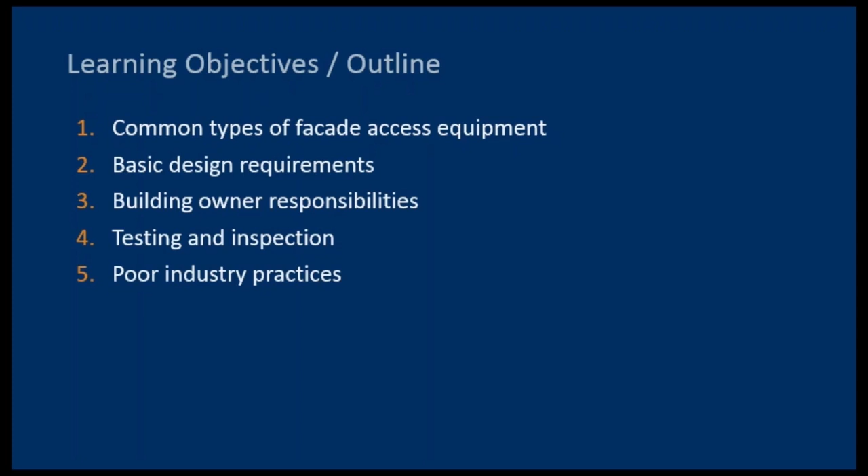We'll also focus on responsibilities that building owners and property managers have regarding facade access equipment. We'll cover some of the aspects of testing and inspections and things that you have to do on a continual basis with respect to this equipment. And we'll close by covering some poor industry practices that you should be aware of, specifically as it pertains to load testing.

To start, let's review some of the types of facade access equipment and the activities that they're commonly used to perform. I should say we'll not give an exhaustive treatment of every possible arrangement that can be used to access the building's facade, but rather focus on some of the more common equipment used on high-rise buildings in the United States.

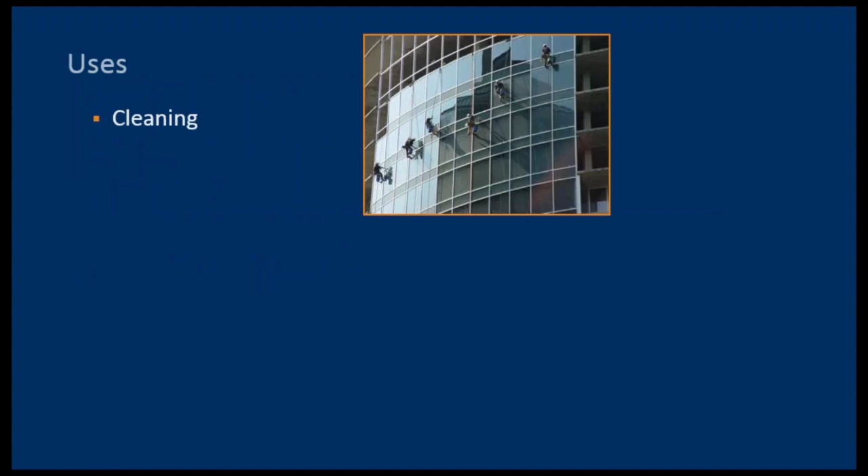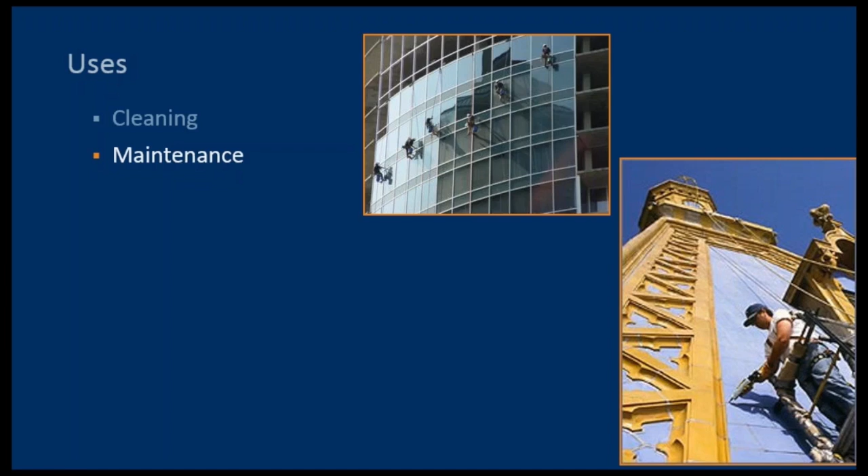So facade access. What do we need to get access to our building facades for? Probably the most common usage of facade access equipment is for window cleaning. Most buildings will have their windows cleaned several times a year depending on the climate. Facade access is also required for general facade maintenance, which may include sealant repairs or window reglazing, for example. Occasionally, more in-depth repairs are required, such as painting, masonry replacement, or metal repairs.

These activities are not all deemed construction activities by OSHA, and there are different requirements for activities deemed as maintenance versus those deemed as construction. Further, the definition of construction is not well defined in OSHA, but generally speaking, anything beyond minimal maintenance qualifies as construction and triggers additional, and in some cases, more stringent requirements.

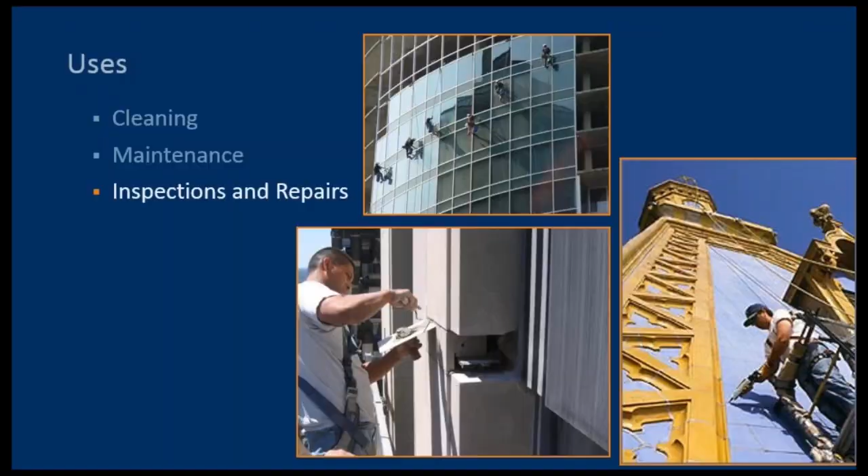While the contractor is responsible for inspecting and maintaining their platform and hoists, the building is responsible for providing suitable points to suspend the platform, as well as sufficient anchorage points to secure the lifelines and tiebacks required.

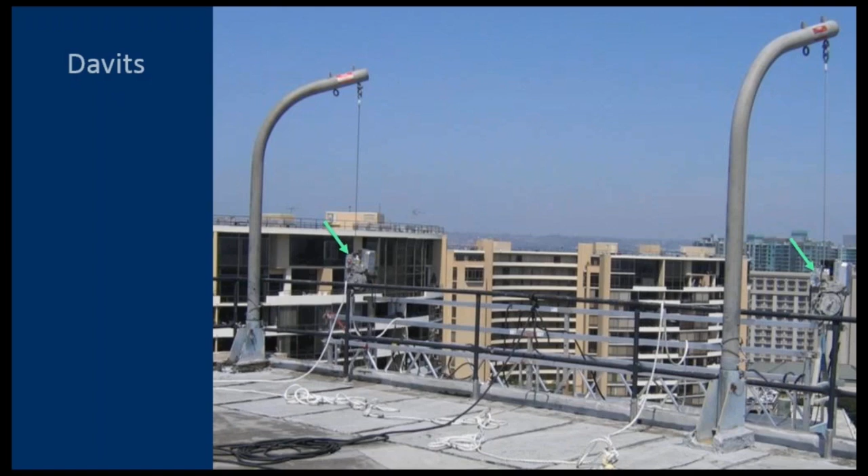Davit systems are often proprietary. There are many different kinds of davit bases. The ones on the previous slide were affixed to the roof framing. This one, in this photograph, is attached to a concrete roof parapet.

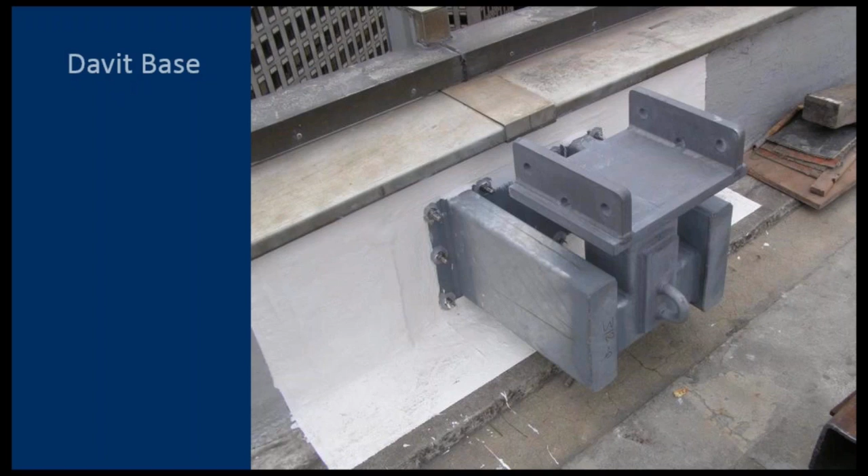Davit systems are typically constructed of galvanized steel components. However, arms more often are made of high-strength aluminum alloys to facilitate ease of installation. If you think about it, the davit arm has to be placed by a worker onto the davit base. So the lighter that davit arm can be made, the better, because it facilitates safe installation of the system.

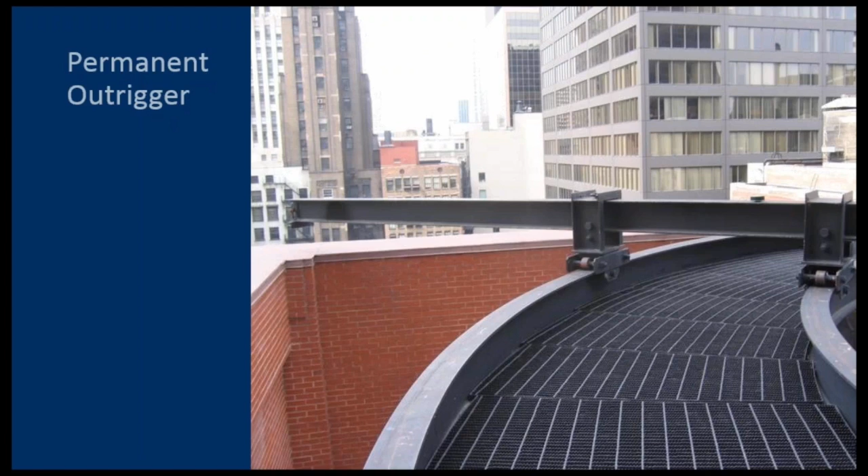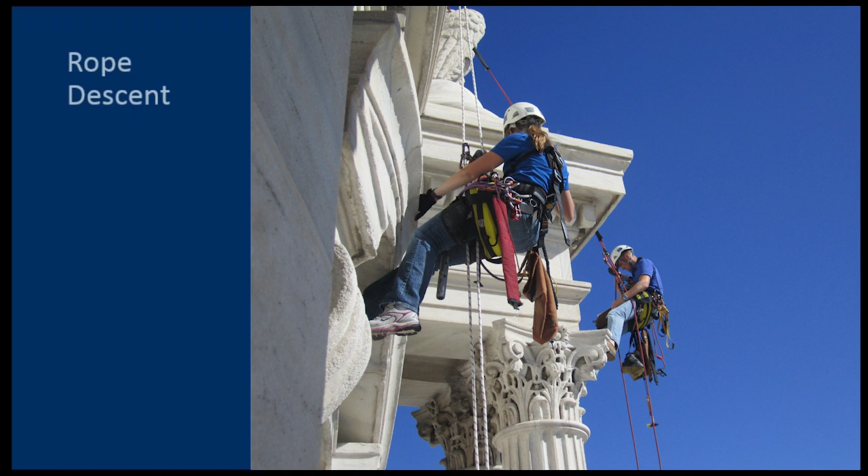Non-powered equipment such as rope descent systems or bosun's chairs are also fairly commonplace in the United States. In this case, the platform, so to speak, is merely a seat board upon which the worker rests. Rope descent systems require 2 lines, a descent or working line to support the platform, and an independent vertical lifeline that will arrest and suspend a worker in the event that they fall off their platform.

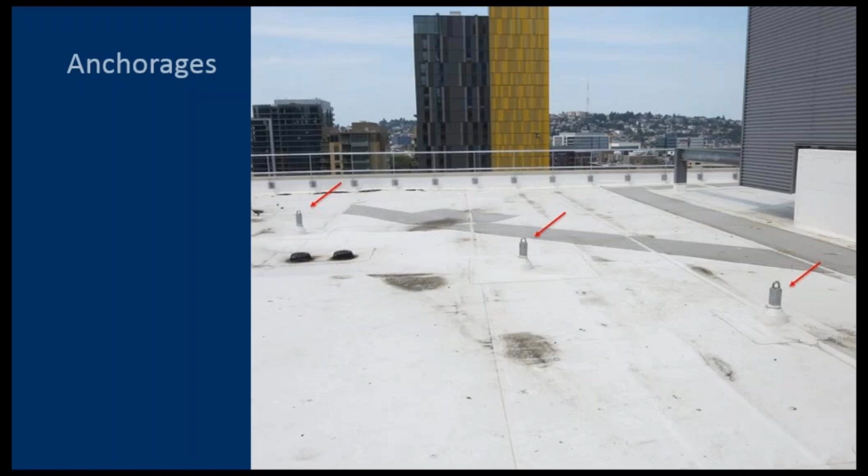Now, spacings for these types of anchorages can vary, but typically range from 5 to 10 feet, such that there are a sufficient number of anchorages easily accessible to workers depending on the wide range of drop locations and rigging configurations that might be used on a particular building.

Here's a close-up view of a typical anchorage. Note that the most important connection details of the anchorage are concealed below the roof level, and inspecting these portions requires removal of the roofing. There's really limited information you can see above the roof about how an anchorage is connected to the structure. In this case, to see that, you would actually have to remove a significant amount of roofing around the anchorage.

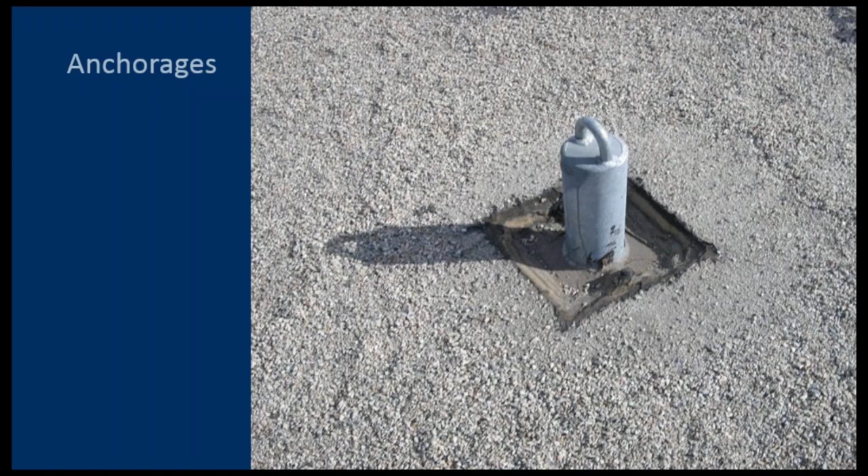Horizontal lifelines. These are sometimes encountered and can be used to connect lifelines, but not working lines. They're complicated systems owing to the fact that the tension generated in the cable can be many times greater than the applied force, just like the tension in a clothesline will far exceed the weight of the clothes it supports. And for those of us who found out that lesson the hard way, playing on our grandparents' clothesline, that's a lesson we can remember. The forces that get generated in these types of systems are very large.

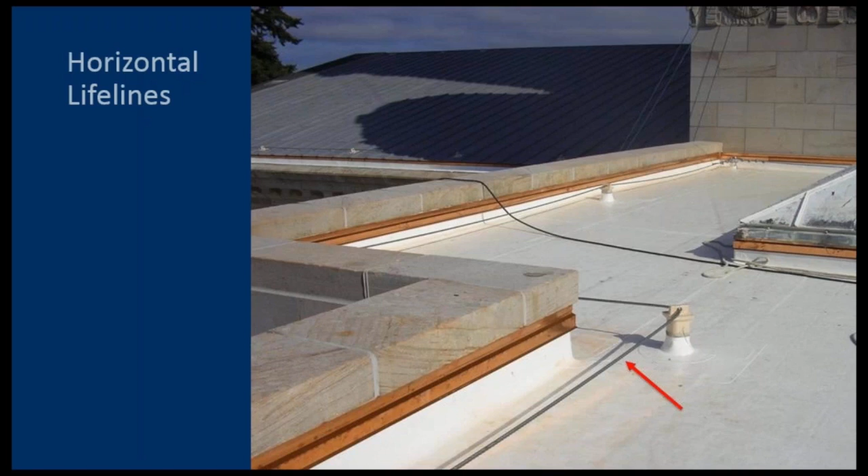Accordingly, a lot of them have energy dissipating devices that limit the forces that the lifeline system itself will transmit to the roof structure. Permanently dedicated horizontal lifeline systems require engineering, and they can often be misdesigned. For example, in this photo, load from a lifeline attached at the location of the arrow would have to travel around 2 90-degree turns to reach the energy dissipating device at the upper right corner of the photo. Due to friction at these turns, the energy dissipating device may be significantly less effective than expected.

Well, that's a brief overview of some of the more common types of equipment that you might find on a high-rise roof, just to get everybody thinking about common types of the equipment. So with that, I'll turn it over to Gwen, who will talk a little bit about design regulations that apply to this type of equipment.

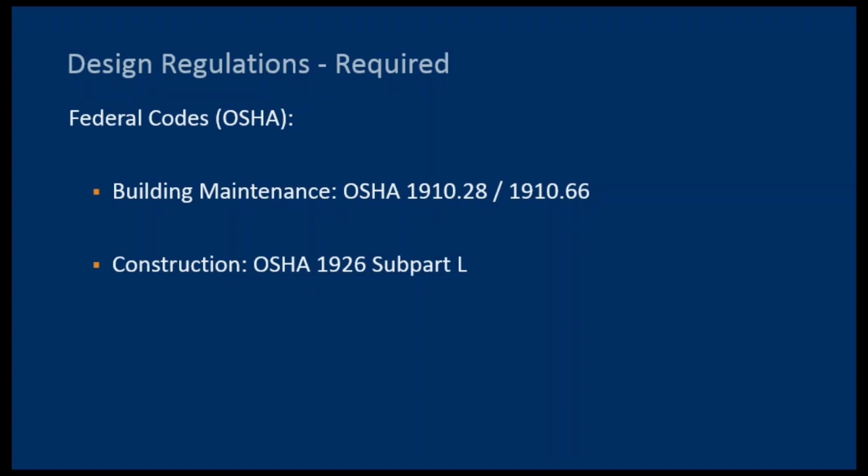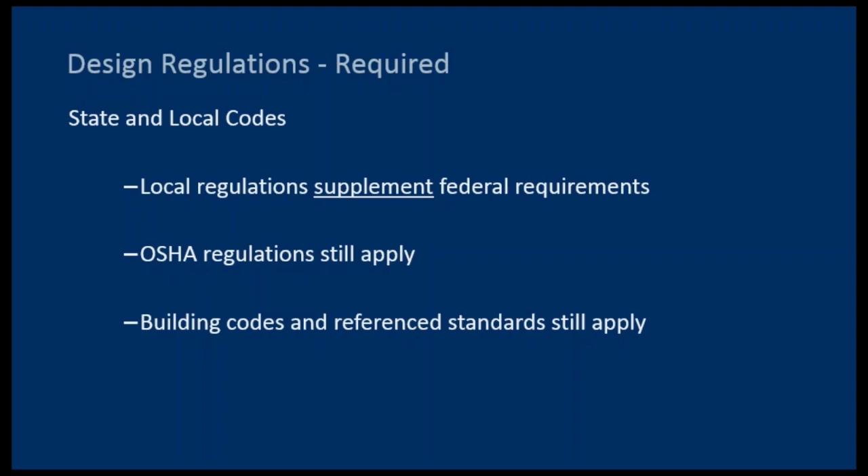You may also have, and you do have, state and local codes. Local regulations supplement the federal requirements. They can't supersede the requirements. OSHA regulations still apply. And the building codes and reference standards within the building codes also apply. So you have a number of documents and ordinances and legal requirements that need to be complied with.

There are even other standards. They're typically voluntary. They're national reference standards, the A120, the A10.8. Again, it sounds like alphabet soup. The I-14. These standards do not supersede OSHA requirements or the building code requirements. They're voluntary unless they're specifically adopted by the jurisdiction. That would be like the local building department.

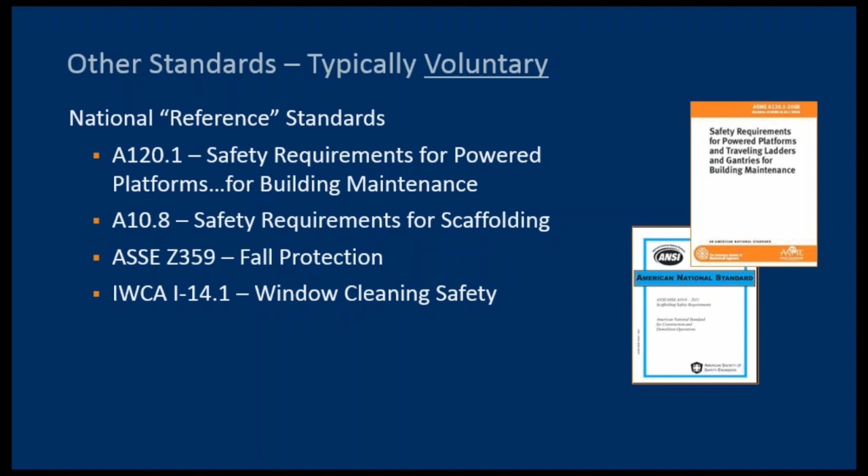I will note that the IWCA had their ANSI accreditation suspended for a while, and their standard has been administratively withdrawn. So it's no longer an ANSI standard. IWCA's accreditation with ANSI is being appealed again by at least 2 different parties. So I'm not sure whether they're going to have a standard in the future either.

There's a new standard published by SEI in 2015. Its purpose is to consolidate and summarize relevant structural provisions in the OSHA regulations into a single document and to present the provisions in a manner consistent with common engineering practice. One of OSHA's problems is that they use a lot of terms that engineers don't really know. They don't have commonly understood definitions, and so there can be a lot of argument about what OSHA is actually requiring. This document puts it into engineering language.

It's intended for structural engineers, architects, and building officials. It contains structural provisions, but no electrical or mechanical provisions. And the committee members were structural engineers.

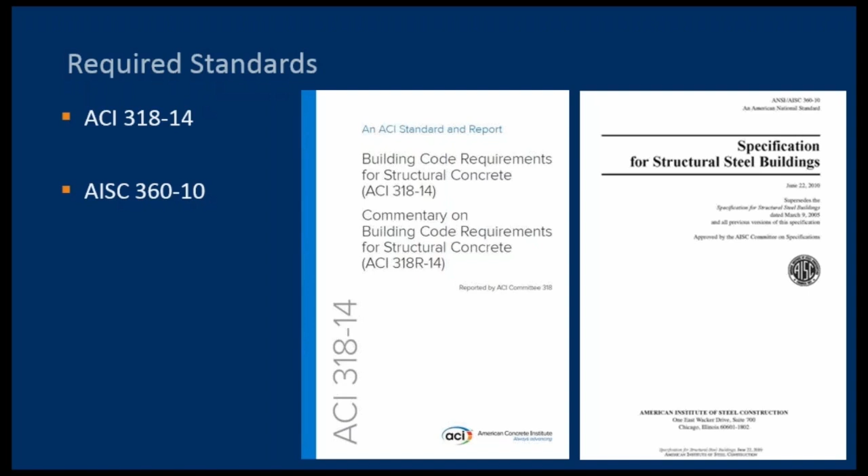The IBC, the International Building Code, you probably all know about this. The 2015 edition adopts 2 other standards, ACI 318, which is concrete, and AISC, the American Institute of Steel Construction, 360. It deals with steel. These are basically the standards one uses to design concrete and steel elements in buildings. And they're legally required to be used where the IBC has been adopted. They both contain testing provisions that must be followed according to law where the IBC has been adopted.

It's not actually the maximum load that the hoist can lift, though. The maximum load would occur if you hit a stall condition. If you're coming up the side of the building and you hit a snag, you hit something that's sticking out, the hoists don't know. The motors just keep going and going, and those davits that reach out over the side of the building can act like giant fishing poles, basically. They start bending down, and the motor keeps going until the motor stalls out.

According to OSHA, that stall load can be 3 times the rated load. So when you ask about, well, what's a realistic load, OSHA actually considers the stall load to be a realistic load. So even though your rated load is 1,000 pounds, the motor can actually probably generate up to 3,000 pounds, and that is a load that your equipment may see if something goes wrong.

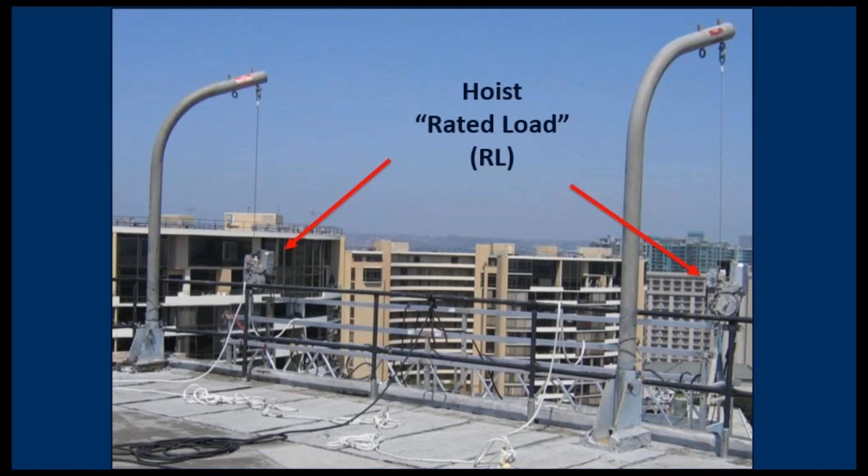Okay, so we know the rated load. It's usually stamped on the hoist. It may also be stamped on the davit arms. At a minimum, davits and permanent outriggers must be able to support 4 times the rated load of the hoist that they support. And again, that's because these are motors, and the motors may keep going even when they shouldn't.

And I talked about how OSHA uses unconventional design terms such as rated load, intended load. These terms tend to cause confusion in the design industry and may be interpreted differently by different designers. We will point out that there are no requirements that the equipment remain undamaged under these loads. Many designers design their equipment to remain elastic under these loads so you wouldn't get damage, but many designers also design these things so that they're at the very edge of what is required.

Okay, so for a typical davit, you would design it for 4 times the rated load. However, if you're using a davit for construction, and construction may be as simple as hanging holiday lights or hanging a sign or painting, OSHA has a different definition of construction than probably most lay people in that respect. If it's used for construction, or if you have a rooftop carriage, the davits would need to be able to support 1.5 times the stall load.

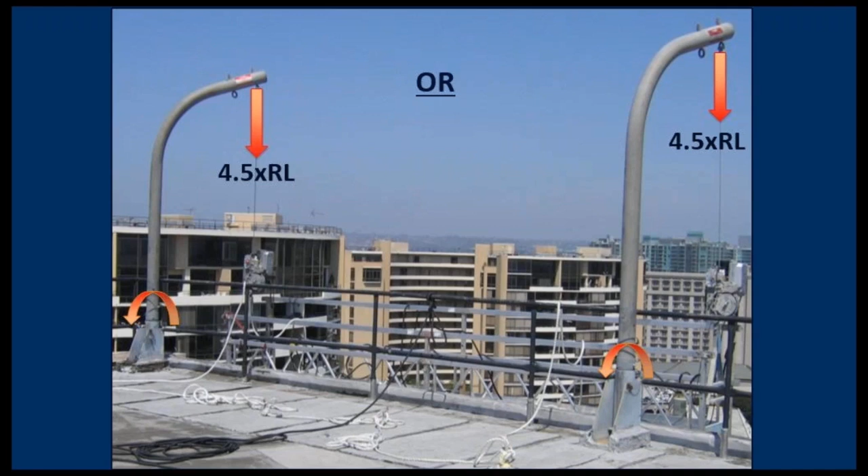Since the stall load can be 3 times the rated load, 1.5 times 3 is 4.5. And that's about 12% higher than a maintenance-only davit. So you have to be cognizant of that when these things are being tested or designed.

John showed you a picture of the Washington Monument, and in there was a working line and a fall arrest line for each worker. Each worker needs 2 lines. If something goes wrong with your working line, which is the line you're suspended with, you need a backup line, something that catches you as you fall. The requirement on the working line is 4 times the supported weight. And OSHA defines the weight as 310 pounds for the worker plus his or her equipment. So if you take 4 times that, that's 1,240 pounds.

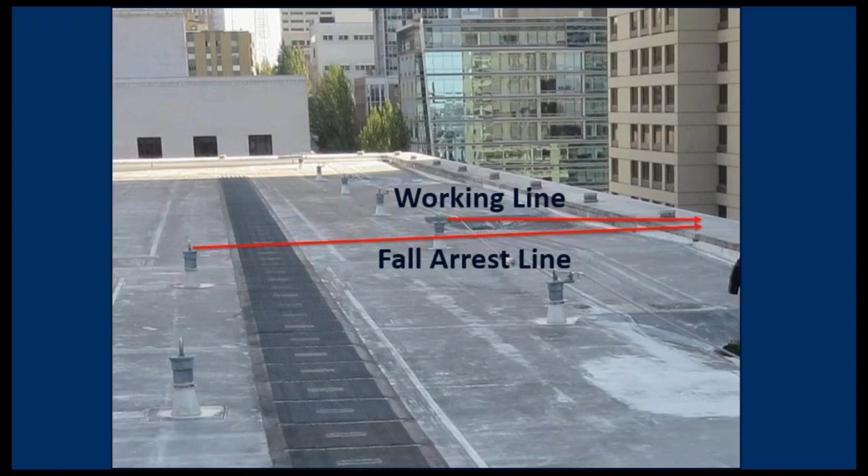For obvious reasons, the fall arrest anchorage needs to be independent from the working line anchorage. The fall arrest line anchorage needs to be designed for 5,000 pounds. Now there is an out in OSHA that says if you have a complete fall arrest system and it maintains a factor of safety of at least 2, and it's used under the supervision of a qualified person, you don't necessarily have to use 5,000 pounds.

The problem with that that we see is the requirement that it has to be used under the supervision of a qualified person. A qualified person per OSHA is someone with a recognized degree or professional certificate and extensive knowledge and experience in the subject field, capable of design. It's basically someone who has a PE. So yes, you can get around the 5,000 pounds and potentially design for something less. However, you're going to need someone with the equivalent of a professional engineering license in order to do that. And that becomes cost prohibitive. So generally, fall arrest line anchorages are designed for the 5,000 pounds.

In addition, on the right, you can see the working line anchorages. Since workers sometimes connect to the wrong thing, they'll connect their working line to a fall arrest anchorage and vice versa. It's generally good to design all anchorages on the roof for the 5,000 pounds that you're trying to support.

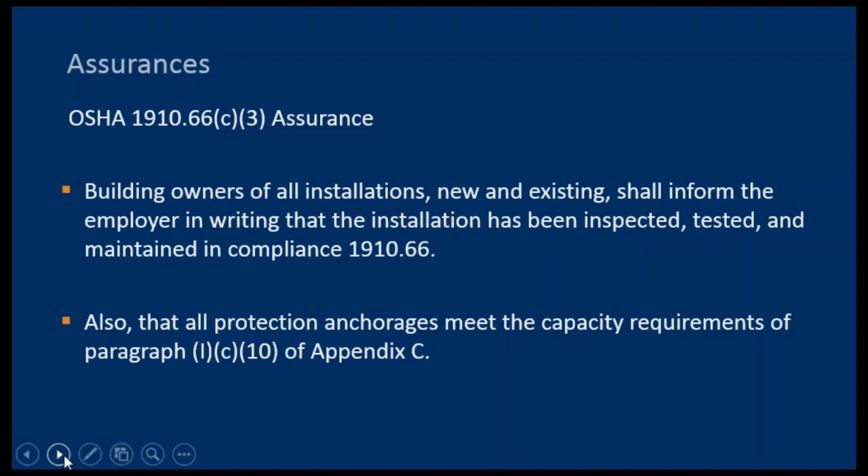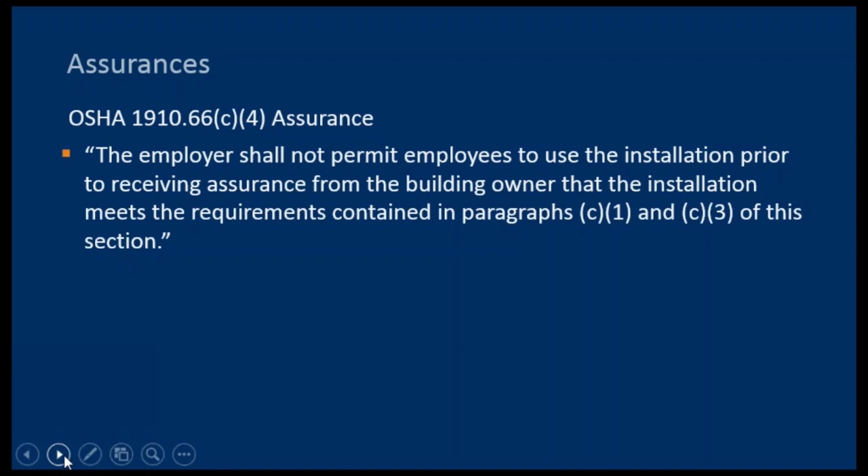Okay, next I'm going to spend a little bit of time talking about the testing and inspection requirements in OSHA. The testing requirements in OSHA are contained in 1910-66 paragraph G. This paragraph requires that all completed facade access installations must be tested in the field prior to being placed into initial service. The in the field portion of the requirement is important because even though an equipment supplier may be able to certify the capacity of their equipment, they cannot verify that the equipment was properly attached to the building.

The load testing allows the professional engineer in charge of the testing to provide the required certification of the installation to the building owner. This is why it is so important that designers of facade access equipment provide equipment that is strong enough or stout enough that it can be load tested in the field to the full required design loads.

There are no requirements in OSHA to perform load tests again later in the life of the installation, unless a major alteration to an existing installation is performed. However, if an owner chooses to do so, or if there is some question about the capacity of the installation, such as significant corrosion or impact damage, or if no evidence exists that the initial testing was ever performed, then it may be prudent to re-verify the installation capacity through load testing.

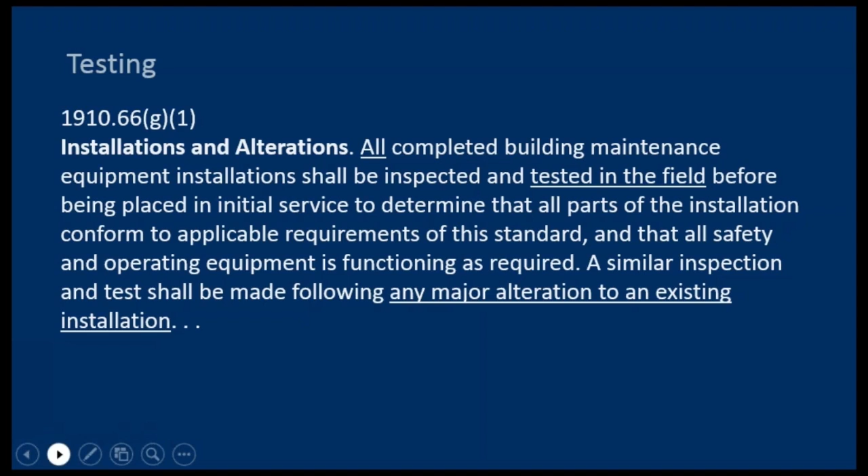Lastly, yearly inspections of facade access installations are required to be completed by a competent person. A competent person is defined by OSHA to be a person who, because of training and experience, is capable of identifying hazards or dangerous conditions in powered platform installations, and of training employees to identify such conditions.

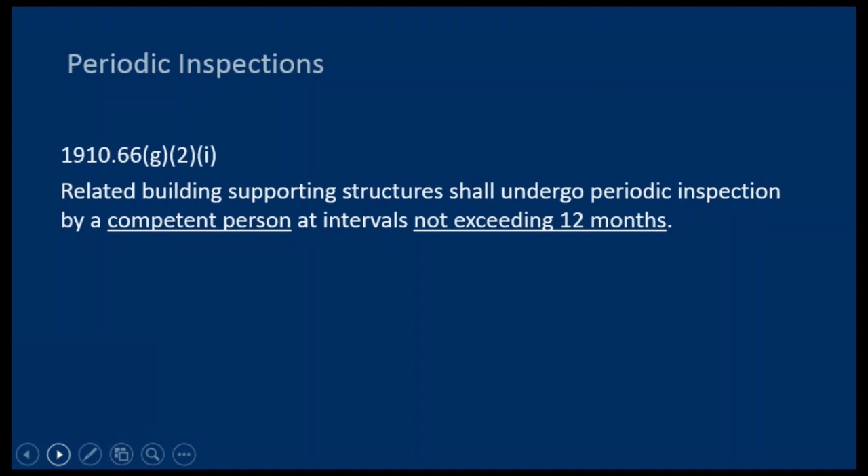Okay, before I turn this back over to Gwen, I'm going to spend a little time demonstrating how we perform load tests on common types of facade access equipment.

It's important to remember that anchorages and equipment attached to a building are not factory fabricated widgets. Although the anchorages or davit bases may all look alike, the attachment of the various anchorages to the building may vary considerably. One anchorage may have been installed perfectly, while the anchorage installed 10 feet away may have mistakenly had the base plate omitted. So although the first anchorage may easily sustain the 5,000-pound design load, the anchorage 10 feet away may fail at 500 pounds. That is why it is so important to test every single component of a facade access installation.

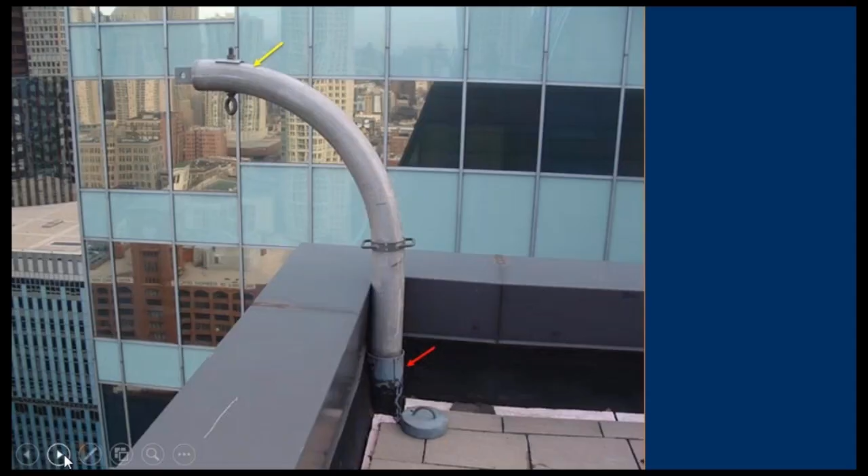This is a picture of an aluminum davit arm, indicated by the yellow arrow, sitting in a davit base, which is indicated by the red arrow. The davit base provides the attachment of the davit arm to the building, and the field testing is required to verify the capacity of the davit base and its attachment to the building. Now, if we also question the capacity of the davit arm for whatever reason, possibly we can't find the manufacturer's documentation on the davit arms, or we aren't sure what alloy the aluminum is, we can test that too. But we typically would not perform this test by dropping weights over the side of the building.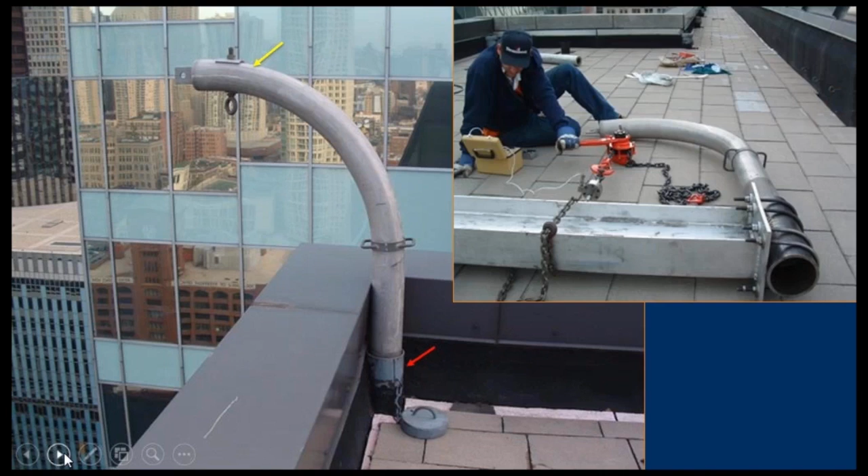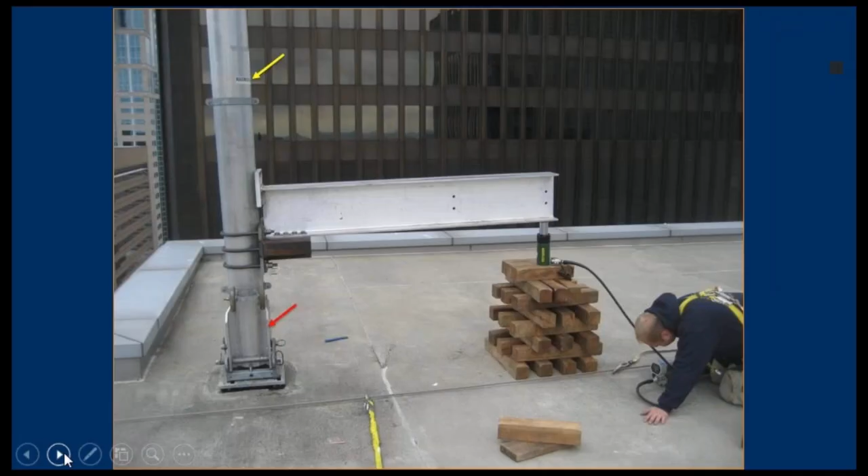This photo demonstrates how we would typically test a davit arm on the building roof using a come-along with a load cell, or possibly a hydraulic jack. This photo indicates how we would typically load test davit bases, using a hydraulic jack, a test arm, and wood cribbing to redistribute the load to the roof. We test the connection of the davit base to the roof structure. The test arm can be moved from location to location on the roof to quickly and efficiently load test a number of davit bases in a single day. Prior to performing the test, we would verify through analysis that the testing would not cause damage to the roof structure.

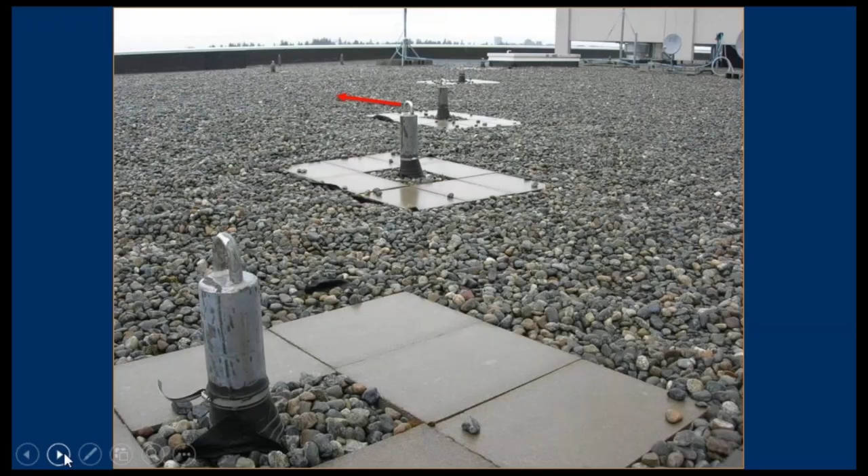This photo shows a number of roof-mounted anchorages that would typically be used to support working lines or fall arrest lines for rope descent type access, or would possibly provide tiebacks for contractor-supplied outriggers. We commonly refer to these as pedestal type anchorages, and they are typically either anchored to a concrete roof deck or welded to steel roof beams. It's important to note that the anchorages must be tested in the direction that they are intended to be used, which is typically toward the roof edge. Simply pull testing the anchorages against one another does not demonstrate adequate capacity of the anchorages in the direction of use. If someone ever tells you that it doesn't matter what direction the anchorages are tested in, then you may want to rethink who you are getting advice from.

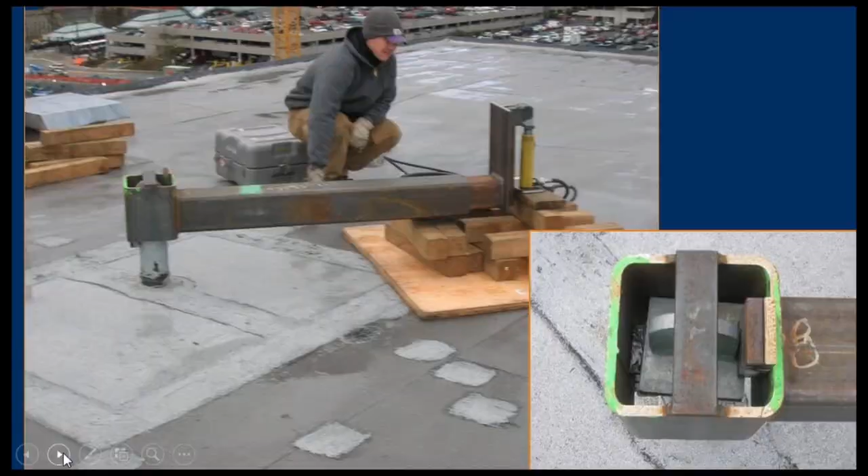In many cases, there is simply nothing in the direction of the roof edge to pull against to test an anchorage. That is why we've developed the test arm shown in the photo above. This test arm can be fitted over the top of a pedestal anchorage and can test it in any direction. Using this test arm with a hand-operated hydraulic ram and some cribbing, we can test a large number of anchorages in any direction in a short period of time.

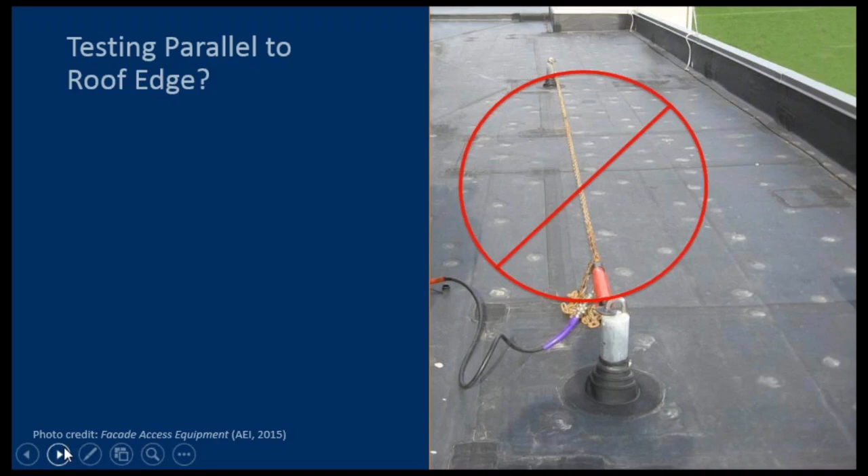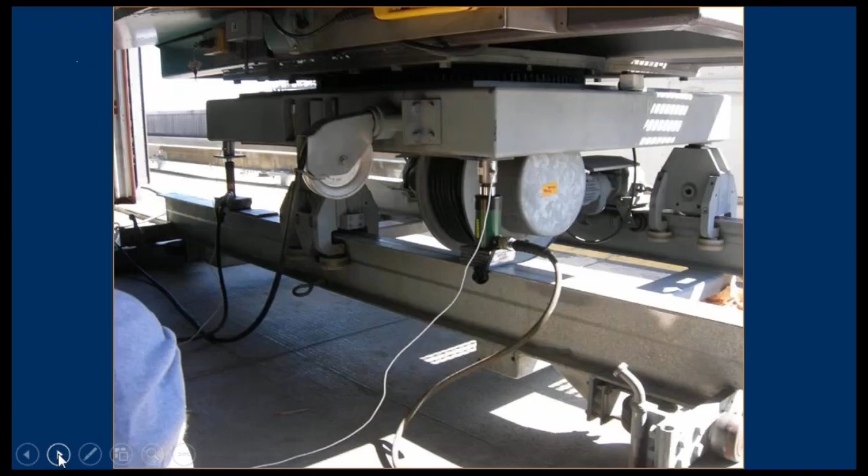Sometimes we come across unique challenges. This photo is one of the unique systems we've tested. It's an older roof carriage supported by rails. The carriage supports a powered platform that services a high-rise building. We performed an analysis considering 4.5 times the rated load of the hoist to satisfy the requirements to support construction activities with the powered platform.

Since the hoist loads would be partially offset by the weight of the carriage itself, we used hydraulic rams and load cells to determine the weight of the carriage at the back rail. The test load on the back rail was then the difference between the uplift caused by the hoist loads and the weight of the carriage.

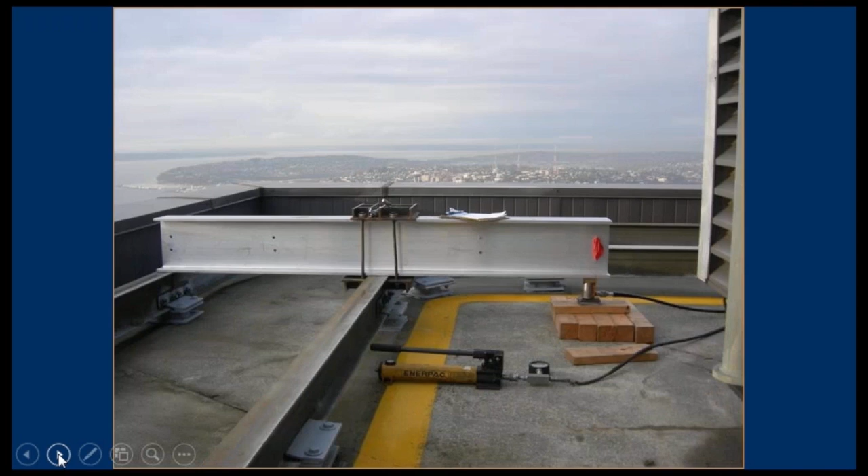With that information in hand, we then tested all of the back rail connections to the building using a test beam and a hydraulic ram. The testing demonstrated that all of the back rail connections were adequate to resist overturning of the carriage due to the full design load of the hoist, which in this case, again, was 4.5 times the rated load of the hoist.

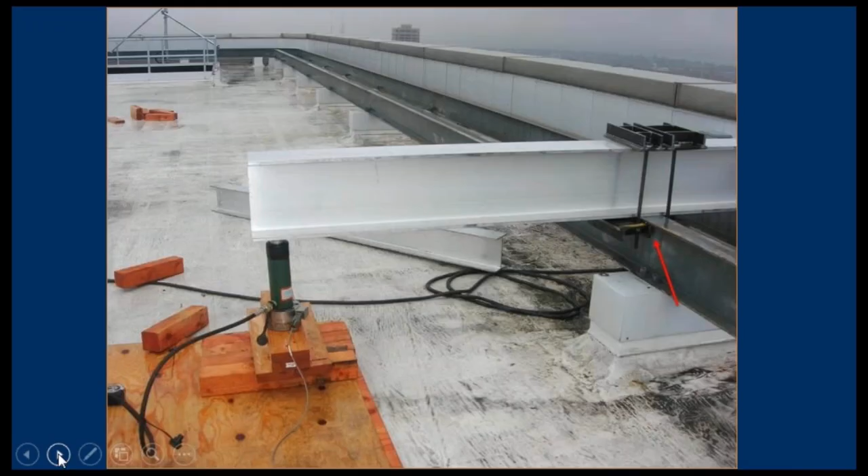This photo is of a different building where we were also testing carriage rail connections. I threw this photo into the presentation just to make a quick point. The arrow in the photo indicates a joint in the rail beam. The typical connection had 4 bolts at the rail connections. However, it was observed that where a joint occurred, there were only 2 bolts on either side of the joint. So at these locations, we performed the uplift test on both sides of the joint to ensure that the connection would work, no matter which side of the joint the carriage was on.

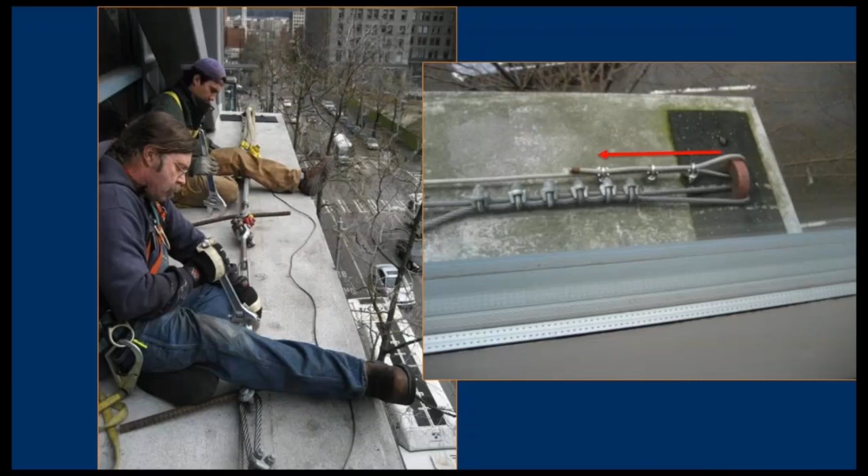These 2 photos show us testing the end anchorages of a horizontal lifeline system. As John stated earlier, similar to a clothesline or even a piano wire, if you pull sideways on a taut horizontal cable, the forces in the cable will be amplified, possibly doubled. The forces in the line are then transferred to the end anchorages. This is important and is often misunderstood. The end anchorages of a horizontal lifeline system are often subjected to loads far in excess of the 5,000-pound fall arrest loads that they are intended to resist.

For horizontal lifelines that pass through many anchorages, the analysis can be quite complicated. In any case, this analysis should be performed prior to load testing so that the appropriate test loads are used in the testing.

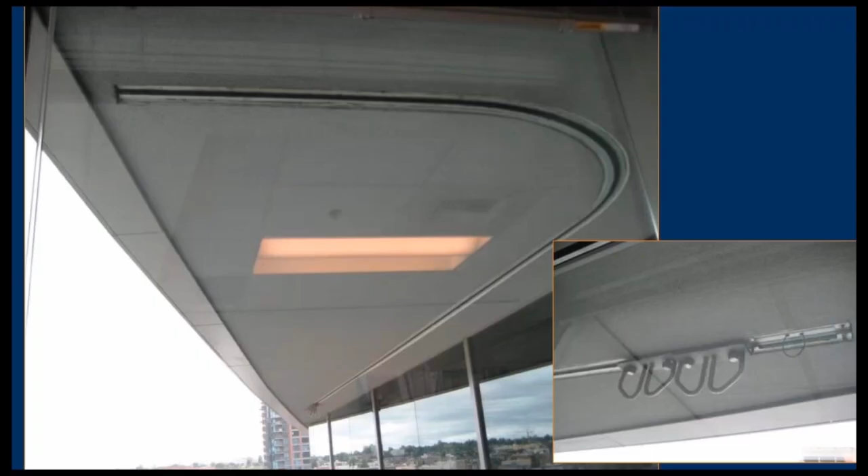Lastly, this photo shows an overhead track and trolley system. The inset photo shows that there are 2 trolleys in the track, one to support the working line and one to support the fall arrest line of the user. One of the primary requirements of OSHA is that the fall arrest anchorage must be independent of the working line anchorage. We do not consider 2 trolleys sitting side by side, supported by the same track, to be independent. Any failure of the track or its connections would cause the worker to fall with no workable lifeline.

In addition, we found these systems are virtually impossible to load test after the building is completed. If this system were to be tested, it would have had to have been performed during construction when the track and connections could be tested without putting the tester at risk.

Well, that's it for me. Hopefully I've helped explain the assurance requirements for owners and the testing and inspections that need to be performed in order to provide the necessary assurances. With that, I'll turn it back over to Gwen to talk about some of the poorer industry practices that we've come across in our experiences with this particular industry.

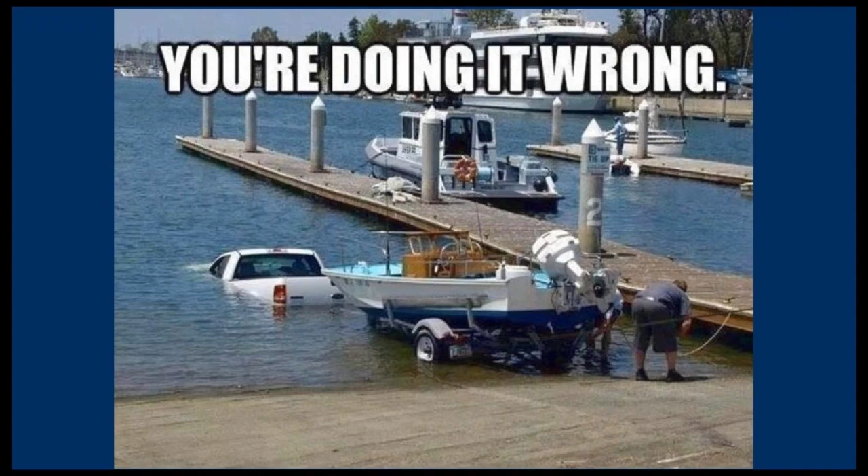The first topic I'd like to cover is half-load testing. There are 2 standards, the A120 and the administratively withdrawn I-14 standard. Both of these standards limit testing facade access equipment to 50% of the full design load, what engineers call the factored load, or the required strength or the required capacity.

The 2 organizations that are listed there provide reasons for not wanting to test to the full amount. Their reasons include they don't want to damage the roofing, and they don't want to damage the equipment that's being tested. At WJE, we believe that the lives of the workers are more important than worrying about damaging the roofing.

If you're doing a load test, there is some potential to damage the roof, and whether you go to half of the load or all of the load, you could still damage the roof if you don't do it right, or if the roof is extraordinarily soft. So you have to take precautions not to damage the roof, and to look when you're all done to make sure you haven't damaged the roofing.

And we would rather have the equipment fail during a load test than when someone's hanging off the side of the building using it. So we think the primary reasons given to avoid testing to the full amount are really not very good reasons.

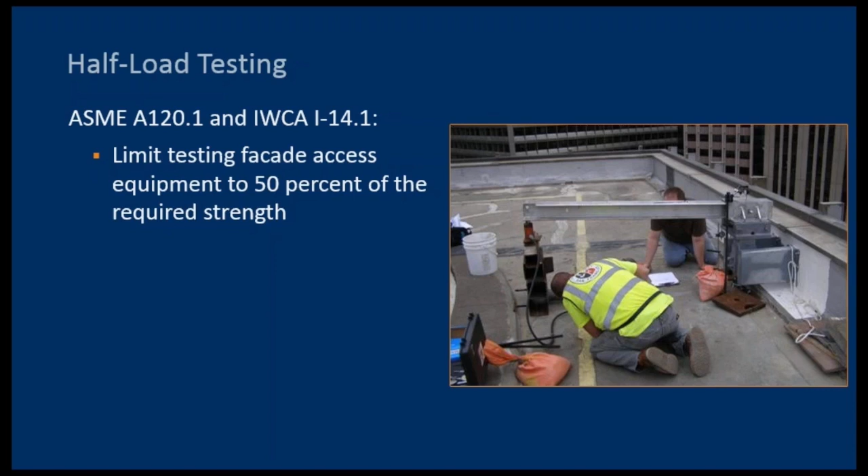I will say that the National Council of Structural Engineers Associations, the American Institute of Steel Construction, a bunch of professors, including professors at Stanford and University of California at Berkeley, and numerous other well-known structural engineering companies all concur that if you're going to do load testing, you need to do it to the full amount. I'm going to try to explain why in non-engineering terms.

This is an example of how load testing can be misused. This is a project we worked on. We were called in after the fact. There were 24 anchors on the roof of this building that were load tested to half of the minimum required strength. 20 of them held the load. 4 did not. So 4 couldn't even hold half of the load.

The engineer in charge certified that the 20 that passed are acceptable and will hold the full amount. So let me give you an analogy. Suppose your employer says, hey, we need a fleet of 24 automobiles to go around, look at properties or whatever. And you're going to want cars that can go at least 70 miles per hour on the highway.

So you go to a car salesman, and the car salesman says, well, you want them to go 70 miles per hour. That's a requirement that you have. But I only want to let you test them to 35 miles per hour. I think you can extrapolate. If it goes 35, it must be able to go 70, right? So personally, I would tell the salesman, no, I need to take it out on the highway. I want to make sure that they work.

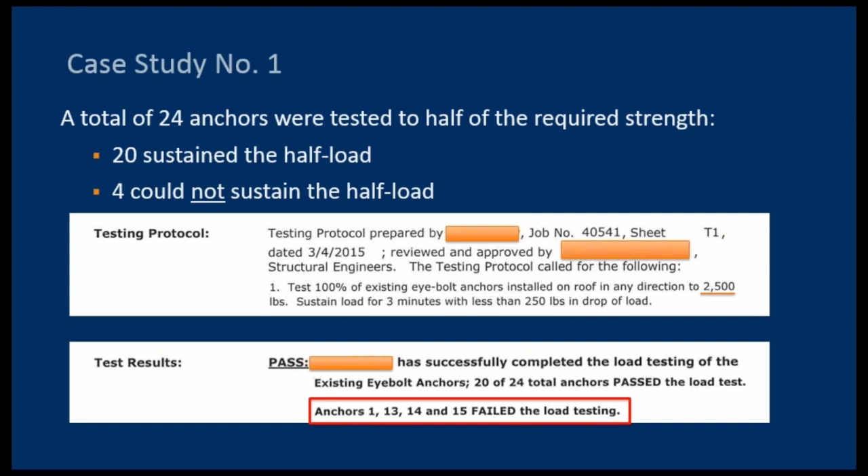Now, suppose that you go ahead and you believe the salesman. You say, okay, all right, I'll agree to a 35 mile per hour speed test of these cars I'm going to buy. And of those 24 cars, 4 of them can't even go 35 miles per hour. I can tell you that at that point, I would seek out probably a new manufacturer of cars. I wouldn't buy that make or model. And I think most people would say, if you can't even make 24 cars that all can go 35, we're not buying that.

Unfortunately, in this case, the engineer actually did certify that the 20 anchors that held the 2,500 pounds can resist the full 5,000 pounds that they're required to resist. On this building, we said we were actually going to use these anchors. We, at WJE, do facade inspections and facade work.

We looked at the report and we said, we're not getting on this building. The load tests don't show what they need to show. Furthermore, you had 4 failures at less than half of the full load. In addition, it turned out that these anchors were tested in the wrong direction. They were reacted against each other, not towards the edge of the building where a fall arrest load would be pulling. So we felt that the tests were so deficient, we advised the owner to find new anchorages or install new anchorages.

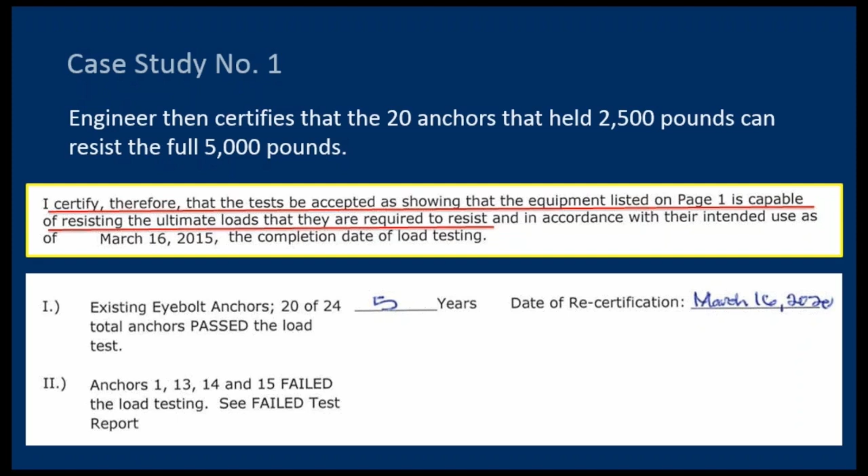Here's another case study. This is load testing of davit bases. These davit bases were previously tested to 2 times the rated load. So again, it's half. They all passed. And they were certified as being capable of resisting the full 4 times the rated load. At some point, the owner said, you know, we really should test these again to make sure that everything's okay.

When we tested them to 4 times the rated load, we found a number of davit bases that fractured during the load test, and of those davits, the load test did not achieve the minimum required strength that they were required to have. So again, the davit bases, some of them were deficient, and the half-load testing to 50% of the full load, or 2 times the rated load, did not catch the problem.

Furthermore, if we had only tested some of those davit bases, most of them actually passed the test, the full load, and most of them passed fine. It was a few that didn't. If we said, you know, we're going to select 20% or 10%, some arbitrary number of davit bases to test, there's a pretty good chance we would have tested those 10 or 20% davit bases and everything would have been fine. And if we had certified the davit bases based on that partial inventory testing, we would have been certifying that the ones we didn't test, and some of them had problems, actually met all the requirements, and that would be wrong.

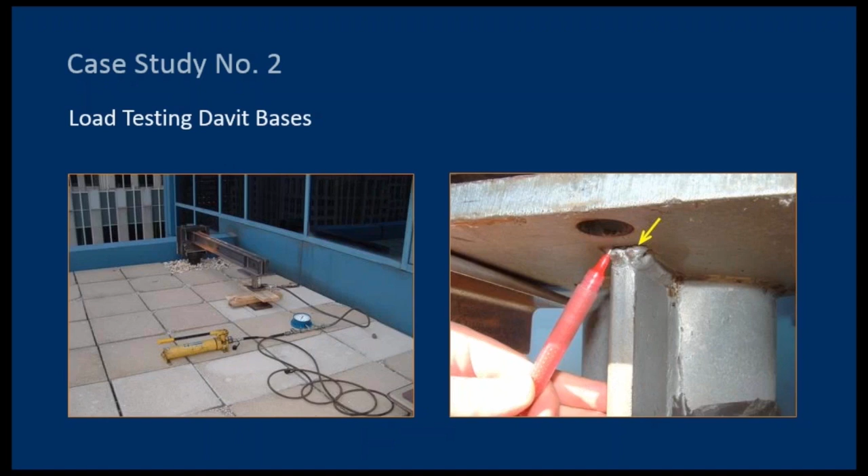Here's one more simple example. Again, it's a davit base that's being tested. You can see the anchor bolts down at the base of the davit base. This was a new retrofit installation to an existing building. The building didn't have any facade access equipment, so we were retained to design new davit bases. We required that all the davit bases be tested prior to being put into use, and at least one of the davit bases failed, didn't achieve the 4 times the rated load.

When we looked at what happened, we actually found that the anchor bolts, which were supposed to be epoxy anchored into the slab a certain amount, some of them weren't. Some of them, they must have hit reinforcing steel in the slab, and rather than move the hole or move the davit, the contractor just put it in short. It wasn't caught during inspections. It was built, and the only thing that caught it was a load test to the full amount.

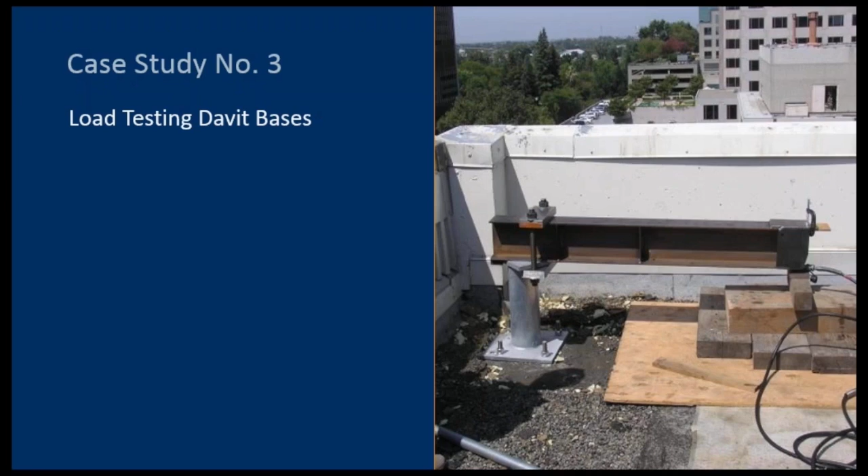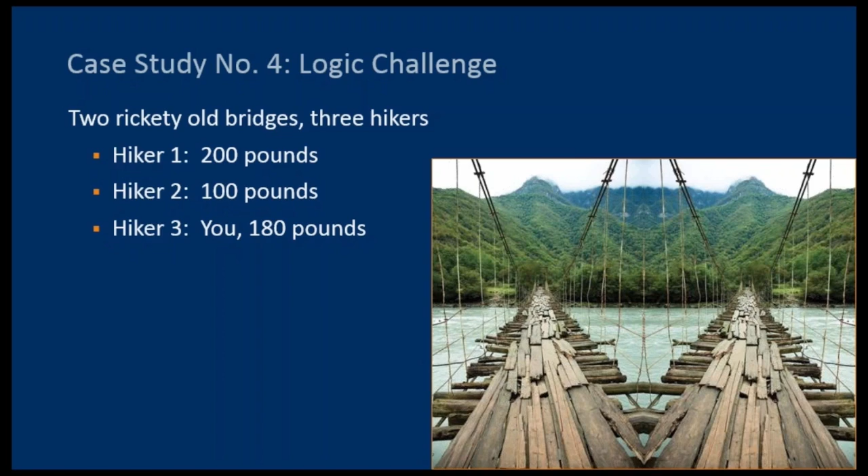Now this isn't a davit. Just like the boat example in the very beginning, I think this sort of drives it home. Suppose you're out hiking with 2 of your friends. You come to 2 rickety old bridges. You can choose the one on the left or the one on the right. Your hiker friends are braver. One of them weighs 200 pounds. That hiker will take the bridge on the left, and the hiker that weighs 100 pounds will take the bridge on the right. And for the sake of argument, we'll assume that you weigh 180 pounds.

Both hikers cross the bridges. So the bridge on the left has now been tested with 200 pounds, and the bridge on the right has been tested with 100 pounds. I don't know about you, but if I weigh 180 pounds, I'm definitely taking the left bridge. That one's successfully been tested with 200 pounds. It didn't break. The one on the right has been tested with 100 pounds, so we know it will take a 100-pound load. We don't know it will take a 180-pound load.

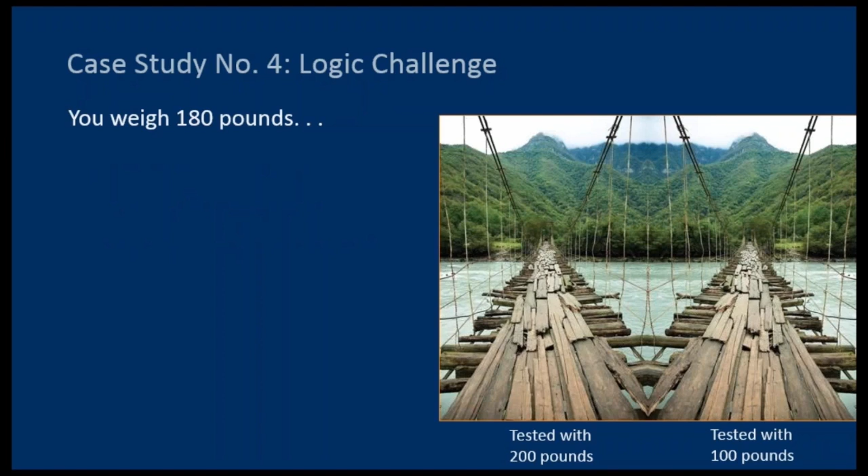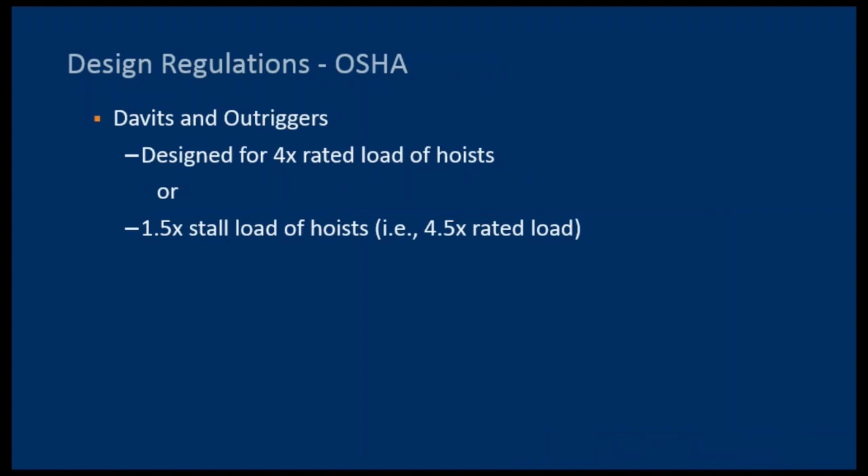Okay, for a brief summary. So davits and outriggers need to be designed for 4 times the rated load of the hoist. That's non-negotiable. If they're used in construction, or if it's a rooftop carriage, they need to be designed for 1.5 times the stall load of the hoist. Stall loads can be up to 3 times the rated load. 1.5 times 3 gives you the 4.5 times the rated load.

Fall arrest anchors, again, must be independent. You need to have a completely separate backup system so that if something happens to your primary support, you're still supported. These need to be designed for 5,000 pounds per worker, or there is an out. You can use a 2 times factor of safety, but you have to use it under the direct supervision of a qualified person. That's essentially a professional engineer. That becomes cost prohibitive. We typically recommend to our clients that they just use the 5,000 pounds per worker as the minimum required load and not skimp on the design.

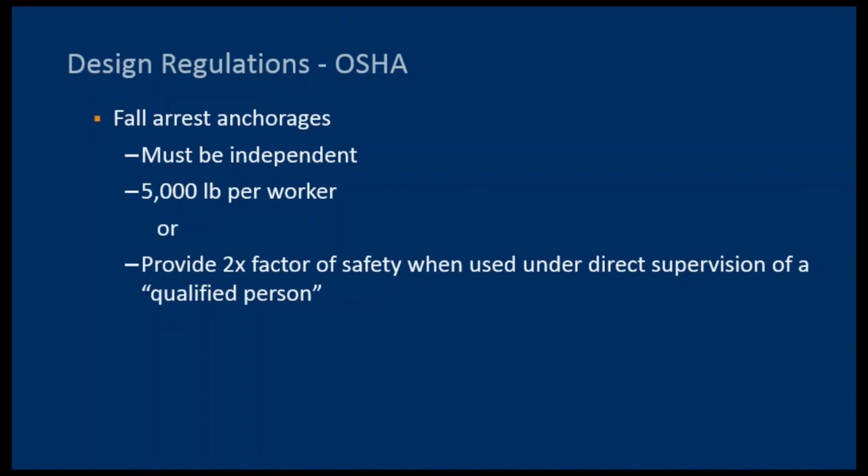In terms of testing and certification, testing of the anchorages in the field is required. Davits, bases, all this stuff needs to be tested before it's used, and they need to be certified, and you get the certification from a professional engineer. Owners are responsible to provide assurances to the people working on their equipment that everything meets OSHA's requirements. Employers, that's the window washers, they're not allowed to let their employees use the equipment without receiving the assurances from the building owner first.

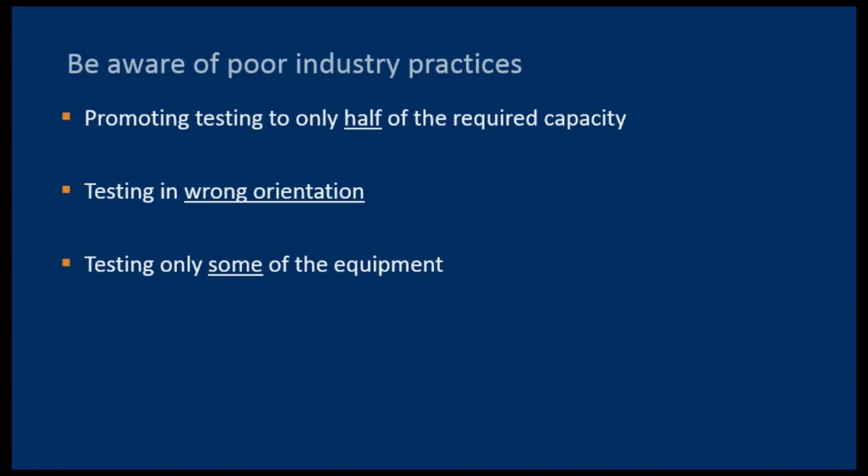And I've talked about the poor industry practices. The three most common are testing to only half of the minimum required capacity, testing in the wrong orientation. That's often easy, but it often gives you the wrong answer because you're not testing it in the direction that the anchorage will be used. And testing only some of the equipment. Again, this seems easy. We're only going to test some of the equipment, but you really want to test all of it for the reasons we've discussed.